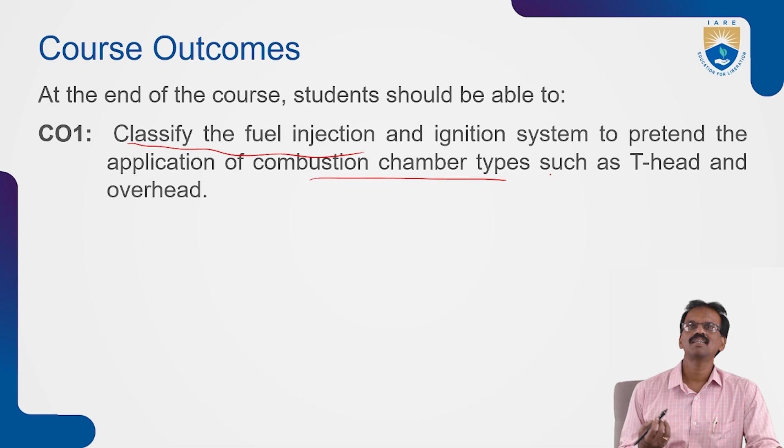Before going to our lecture, we'll see our course outcome for this topic, mainly unit one. At the end of the course, students should be able to classify the fuel injection and ignition systems, and to interpret the application of combustion chamber types such as T head and overhead based upon the different combustion processes.

We know that the IC engine is a heat engine because it converts the chemical energy of fuel into heat energy and mechanical energy. Based upon the combustion, if the combustion takes place outside the cylinder, we call them external combustion engines. If the combustion takes place inside the cylinder, we call those internal combustion engines, IC engines.

Internal combustion engines are mainly two types. One is the SI engine, another one is the CI engine. The SI engine is the spark ignition engine. It means ignition or combustion takes place by the effect of the spark plug, because the spark plug gives the ignition and combustion will start in the cylinder. We already discussed SI engines.

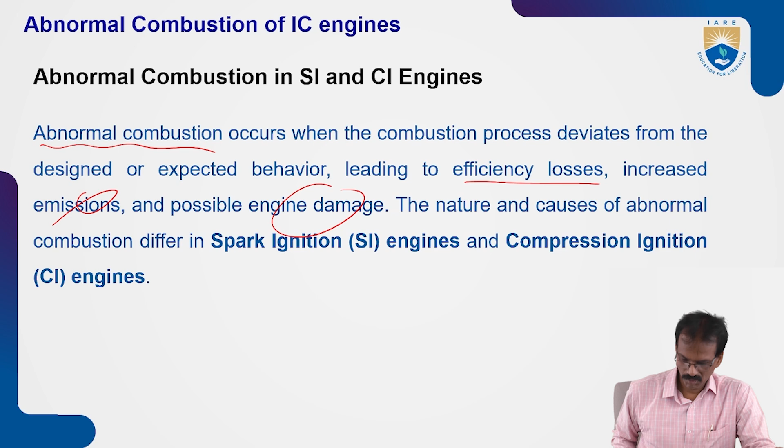Knocking. This is a very dangerous effect of the abnormal combustion process. Detonation is the main drawback of abnormal combustion in IC engines. We'll see what is the cause, what is the reason behind this. The end gas, otherwise unburned mixture, auto ignites due to high temperature and pressure before the flame front reaches it.

In normal combustion, the spark plug gives the spark. Due to this spark, ignition takes place, and due to the ignition, combustion will start and the flame will start. Due to this combustion, the flame will expand or propagate from this point throughout the unburned mixture. In this way, the systematic propagation of flame goes forward to burn the unburned air fuel mixture.

This gives the peak pressure. We get the peak pressure after TDC, very near to TDC. We already discussed this one. So this is the required combustion process, the normal combustion process.

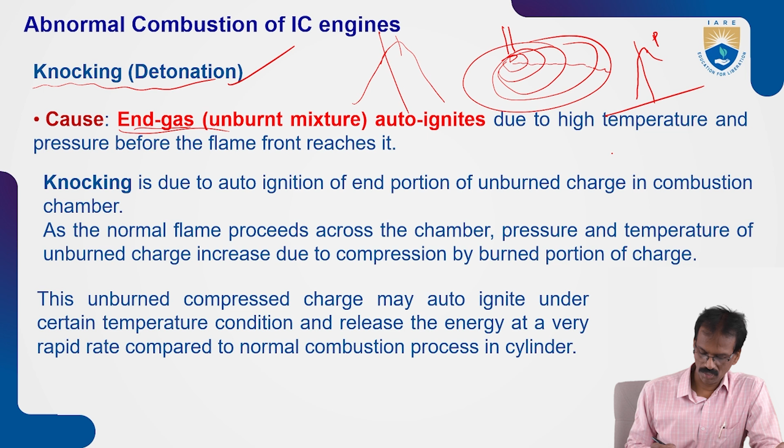But in abnormal combustion, what will happen? The end gases or end fuel auto ignites. Suppose this is the cylinder and this is the spark plug. Due to the effect of the spark plug, ignition takes place and combustion starts. The flame propagates like this.

Due to this combustion process, high pressure and temperature are released. This high pressure and temperature compresses the unburned air fuel mixture here. Due to this high pressure and high temperature, the unburned air fuel mixture burns automatically without any help of the flame propagation.

Without any help of this flame. Okay. So self ignition will occur here without any effect of spark ignition or flame propagation, which starts from the spark ignition. Okay. So due to this self ignition, here we will see high pressure and temperature release. So one is the gradual increasing pressure and temperature, and another, just in the opposite direction, another pressure wave will occur. Okay, so due to these two types of pressure waves, we can see here.

So due to this effect, automatically we can't get the highest peak pressure. So sometimes this peak pressure will occur before TDC and very near TDC also, like this one. Okay. So due to the effect of this one, in the expansion we can't get the good high pressure, high thrust force to move the piston from top dead center to bottom dead center. So efficiency of the engine will reduce due to the effect of auto ignition or knocking or detonation process.

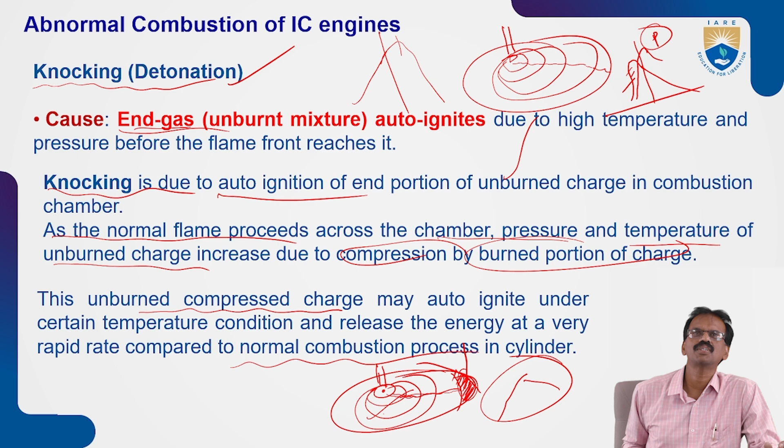So this is just like normal combustion. Due to the normal combustion, we will get the gradual increase of pressure and temperature. Okay, so there is some contradiction, because two types of pressure waves we will see here. Okay, so that is called knocking or detonation. This rapid release of energy during auto ignition causes the high pressure differential in the combustion chamber. Okay, a high pressure wave is released due to the effect of auto ignition. That pressure wave spoils the top surface of the piston, and the inner surface of the cylinder also.

Okay, so the motion of high pressure compression waves inside the cylinder causes the vibration of engine parts. Next, pinging noise, some type of noise is audible, so we can listen to that one. So this is known as knocking process. What is the knocking process? Due to abnormal combustion, due to auto ignition of the unburned fuel placed at the end of the cylinder, a high pressure wave will be released, and high pinging noise will occur. This high pressure wave causes the vibration of engine parts and pinging noise also.

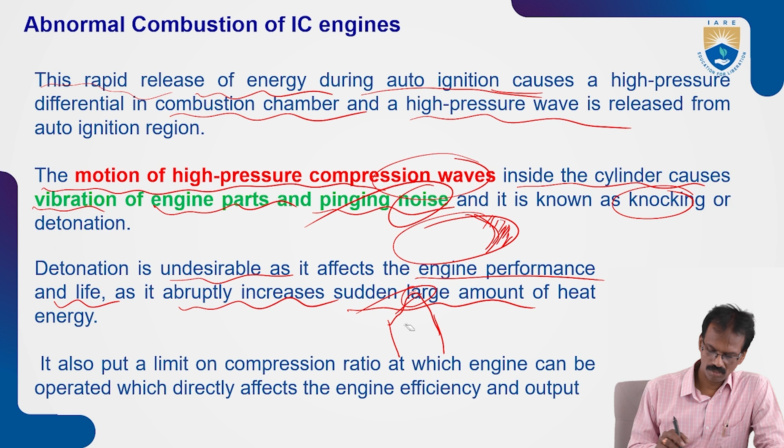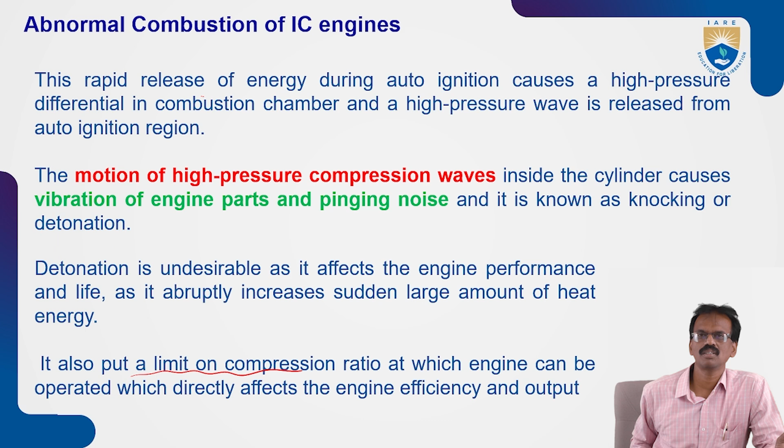Okay, so it abruptly releases a sudden large amount of heat energy. So high amount of heat energy and high pressure. So due to this, the parts of the engine will be spoiled. At the same time, the efficiency of the engine decreases. Okay, it also puts a limit on the compression ratio at which the engine can be operated, which directly affects the engine efficiency and the output, because it limits the compression ratio. So that leads to an effect on engine efficiency and output.

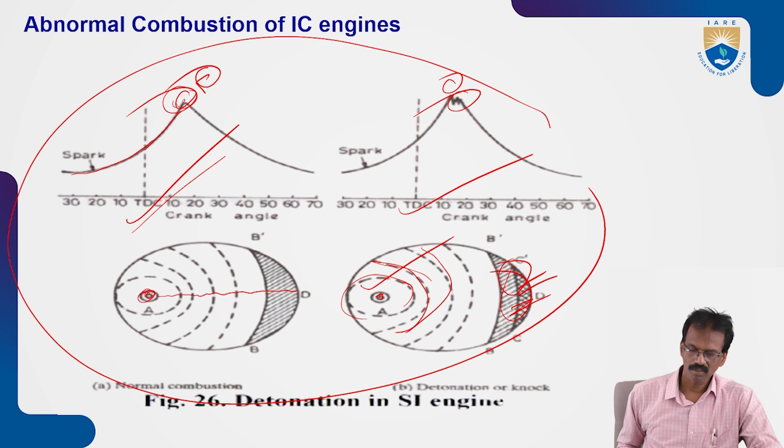Now we'll see auto ignition, already discussed. A mixture of fuel and air can react spontaneously and produce heat by chemical reaction in the absence of flame - meaning without any flame or ignition process. So the unburned fuel ignites selfly. That is called auto ignition. This type of self ignition in the absence of flame is known as auto ignition.

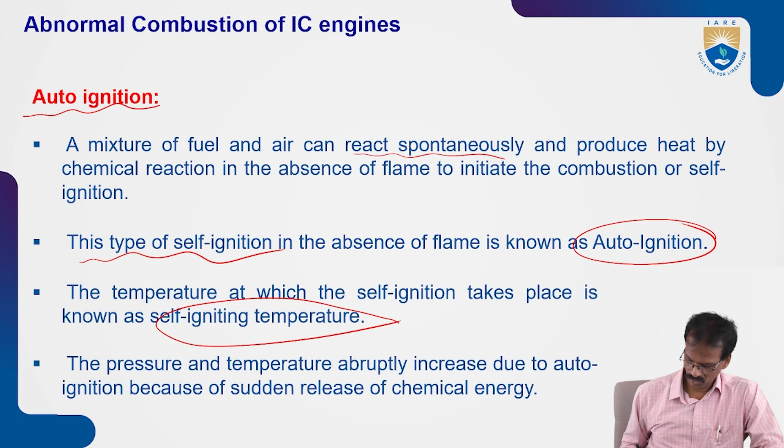Self ignition without any effect of flame or ignition systems like spark plug - so self ignition occurs, that is called auto ignition. The temperature at which self ignition takes place is known as self igniting temperature. The pressure and temperature rapidly increase due to auto ignition, because of the sudden release of chemical energy. This auto ignition leads to abnormal combustion, known as detonation.

Detonation is undesirable because it has a bad effect on engine performance and life. This detonation or knocking will spoil or reduce the performance of the engine, reduce the life of the engine, and spoil engine parts. It abruptly increases the sudden large amount of heat energy. In addition, knocking puts a limit on compression ratio, because this knocking influences the compression ratio. If the compression ratio is influenced, automatically the engine efficiency would decrease.

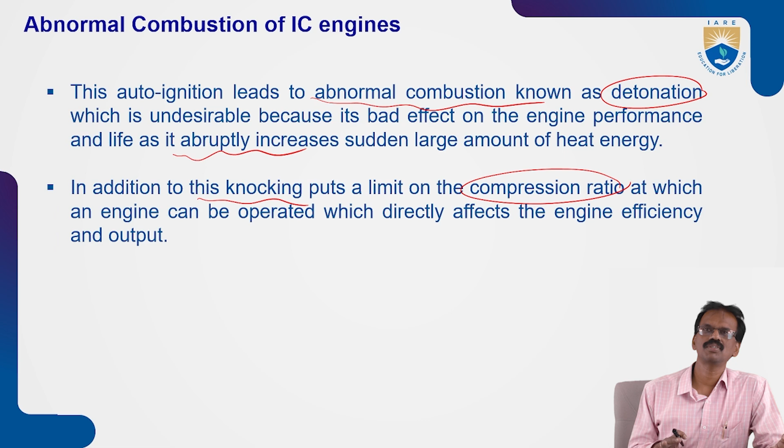So, pre-ignition - auto ignition and pre-ignition are very similar terms. Pre-ignition means: suppose this is the spark plug, this is the cylinder. Ignition starts by the effect of the spark released by the spark plug - that is the normal condition.

But sometimes, due to high temperature of the spark plug and some valves - due to high temperature of the valve surface and spark plug surface - the air fuel mixture will burn selfly without any ignition process. That is the pre-ignition process. Pre-ignition is the ignition of the homogeneous mixture of charge as it comes in contact with hot surfaces of the spark plug, hot surfaces of the walls, and hot surface of the cylinder.

So auto ignition may overheat the spark plug. Due to the effect of auto ignition, the temperature of the spark plug and exhaust valves will increase, and pre-ignition also occurs. It remains so hot that its temperature is sufficient to ignite the charge in the next cycle. So auto ignition leads to pre-ignition: due to the effect of auto ignition, the temperature of the spark plug surface and exhaust valve surfaces increases, which leads to the pre-ignition process.

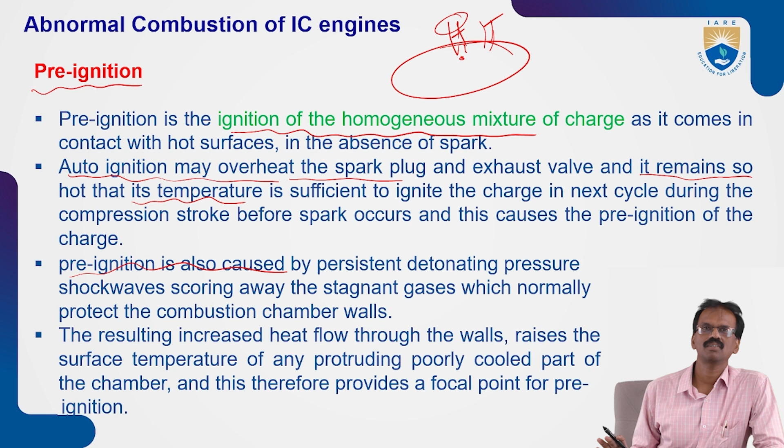Pre-ignition process means ignition occurs selfly without any effect of the spark plug, without any ignition process - ignition process meaning the spark given by the spark plug. Pre-ignition is also caused by persistent detonation pressure. Due to pre-ignition, sometimes the peak pressure will occur before TDC, which leads to a bad experience for the piston, because before TDC means the piston moves in the upward direction.

After TDC means the piston moves in the downward direction. So the pressure acting in the downward direction while the piston moves in the upward direction - that is not a helpful and useful thrust. Because of this pre-ignition, so many drawbacks, defects, or damages are there. We'll see.

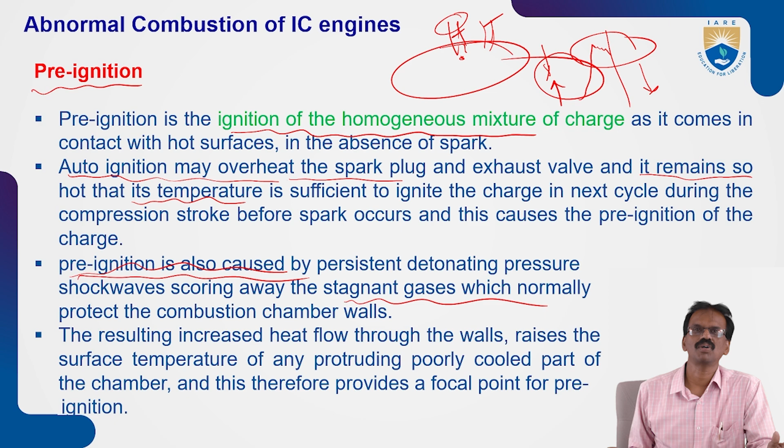Pre-ignition is also caused by persistent detonation pressure, shock waves scoring away the stagnant gases which normally protect the combustion chamber walls. So this is the process of pre-ignition. Next, we will see the effects of pre-ignition.

It increases the tendency of detonation in the engine. Pre-ignition leads to increased tendency of detonation. It increases the heat transfer to the cylinder walls due to pre-ignition. The heat released in the abnormal combustion process is absorbed by the cylinder walls. Heat transfer takes place from

combustion to the walls, combustion to the spark plug, and combustion to the exhaust valves. So due to this pre-ignition, the temperature of the surface of the spark plug, the exhaust valves, and the cylinder walls would increase. It increases heat transfer to the cylinder walls because high temperature gas remains in contact with the cylinder walls for a long time.

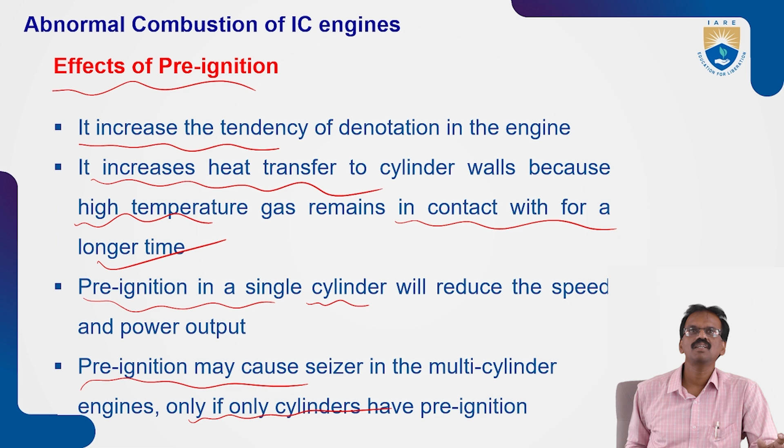Next, pre-ignition in a single cylinder will reduce the speed and power output also. This abnormal combustion leads to reduction in speed and power output. Pre-ignition may cause seizing of the piston in the cylinder due to the effect of detonation. Automatically the piston will seize in the cylinder. So these are the main effects of the pre-ignition process.

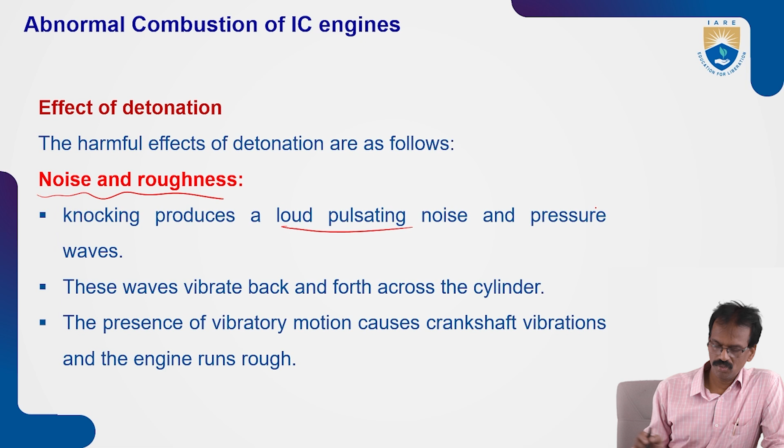Next, effects of detonation. The harmful effects of detonation are mainly noise and roughness. We hear some type of pinging noise and different types of noise. So roughness: knocking produces a loud pulsating noise and pressure waves, which vibrate the engine cylinder also.

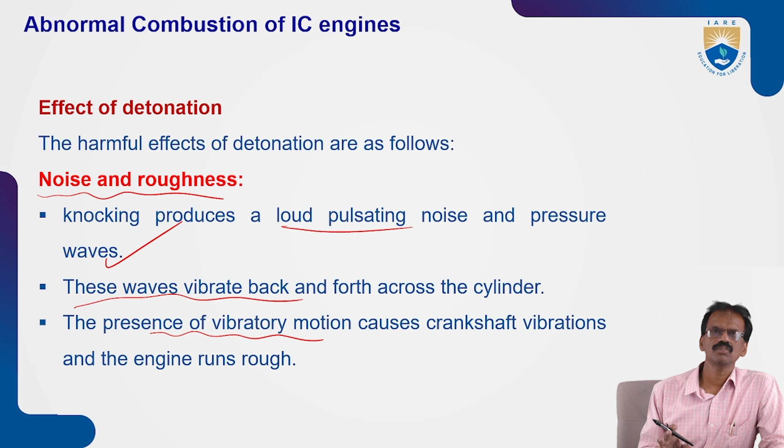Next, the presence of vibratory motion causes crankshaft vibrations, so the engine runs roughly. This is the effect of detonation.

Next, mechanical damage can also be seen due to the effect of detonation. High pressure waves are released due to detonation. These high pressure waves generated during knocking can increase the rate of wear of the parts of the combustion chamber, wear on the piston surface, and wear rate on inner surfaces also.

Severe erosion or damage of the piston crown or surface can occur due to the effect of detonation. Cylinder head damage also occurs, and damage on the inlet and outlet valves also.

So there are many problems and damages that occur due to the effect of detonation. In small engines, knocking noise is easily detected and corrective measures can be taken. But in aero engines, big engines, it is difficult to detect the knocking noise. Hence corrective measures cannot be taken, so that leads to big damage. Severe detonation may persist a long

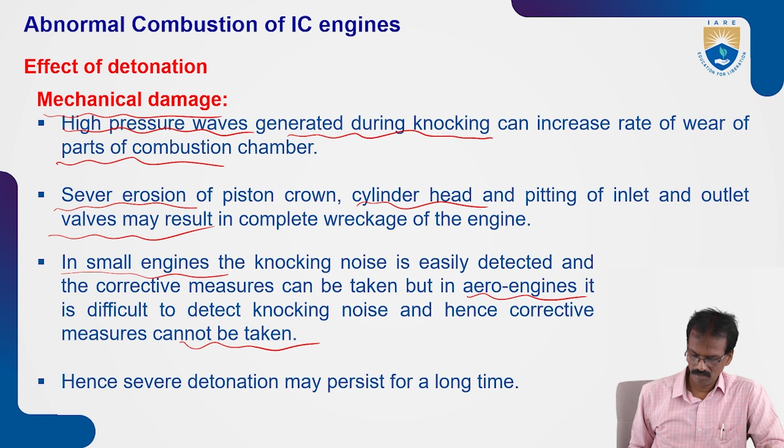time. Next, carbon deposits. Detonation results in increased carbon deposits. Due to this detonation, unburned fuel particles form on the inside cylinder surfaces.

Next, increase in heat transfer. Due to this knocking, high temperature and pressure are released. The temperature is absorbed by the surface of the cylinder, the spark plug, the inlet walls, and the exhaust walls. So knocking is accompanied by an increase in the rate of heat transfer to the combustion chamber walls.

The increase in heat transfer is due to two reasons. The maximum temperature in a detonating engine is about 150 C higher than in non-detonating engines. So automatically this high temperature leads to damage of the engine parts because of overheating, and the mechanical properties of that part will decrease.

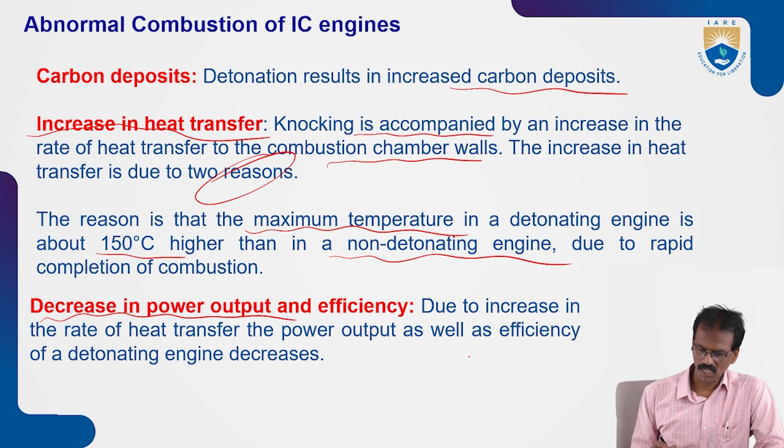Next, decrease in power output and efficiency. Due to the increase in the rate of heat transfer, the power output as well as the efficiency of the engine will decrease. Next, pre-ignition.

Pre-ignition causes an increase in the rate of heat transfer. Due to this heat transfer rate, pre-ignition occurs, which may cause local overheating, especially for the spark plug and the exhaust valves, which may reach a temperature high enough to ignite the charge before the passage of the spark, causing pre-ignition.

We'll see the various engine variables affecting knocking: temperature factors, density factors, time factors, and composition factors. Due to these factors, there are chances of getting knocking. We'll see what the different parameters are.

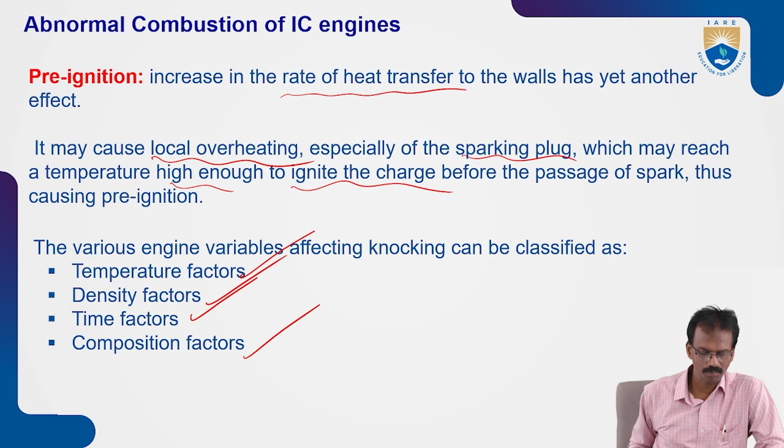The first one is temperature factors. Increasing the temperature of the unburned mixture increases the possibility of knocking. You have to maintain a certain temperature; more temperature leads to the detonation process.

Next, raising the compression ratio gives good output, but over-compression ratio leads to detonation or knocking problems. Supercharging is also very important, filling up the cylinder completely with the air-fuel mixture.

Okay, that gives good output, but over supercharging sometimes leads to detonation, the tendency of detonation. So you have to maintain the optimality.

Next, coolant temperatures. Coolant temperatures are very important. Delay period decreases with increase in coolant temperatures, which increases the tendency of knocking. So how to maintain all the parameters.

Next, density factors also. Density of the fuel - increasing the density of unburnt mixture will increase the possibility of knocking in the engine. So the engine parameters which affect the density are as follows.

Increased compression ratio increases density. If we increase the compression ratio, you know that's total volume by VC. Next, increasing the load opens the throttle valve more, and thus density of the charge will be increased.

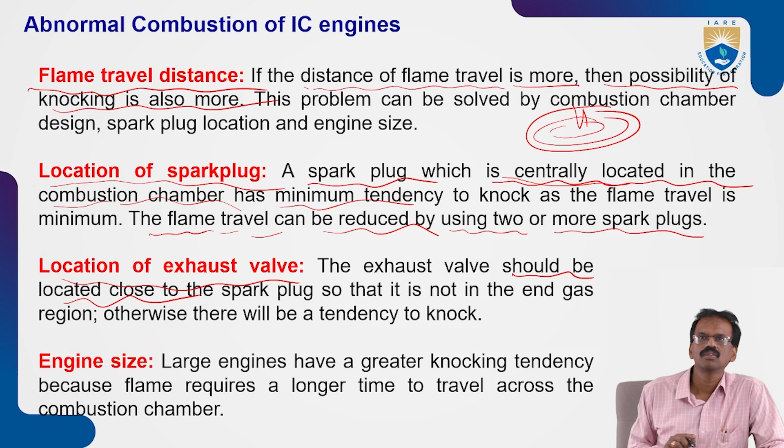Next, location of exhaust valves is also very important. The exhaust valve should be located very close to the spark plug, so that it is not in the end gas region. Otherwise, there will be a tendency.

Due to the effect of the exhaust valve, unburned fuel particles or exhaust gas will be exhausted to the outside. So automatically you know that 40 to 50% of heat will be exhausted by exhaust gases through exhaust valves. So positioning of exhaust valves is also very important.

Next, engine size is also a very important parameter. By controlling these sizes, we can reduce the tendency of knocking. Large engines have a greater knocking tendency because the flame requires a longer time.

Because large size means flame travel distance is very high. If the flame travel distance increases, automatically the tendency of knocking would increase. So these are very important parameters we have to consider when designing the engines, preparing the engine cylinders.

Due to abnormal combustion, which is the main problem, knocking or detonation occurs due to auto ignition or pre-ignition. We have to address that problem. To overcome it, we have to take care of influencing parameters like flame propagation distance, location of the spark plug, location of the exhaust valves, engine size, delay timing, time factors, and density factors - we have to consider these.

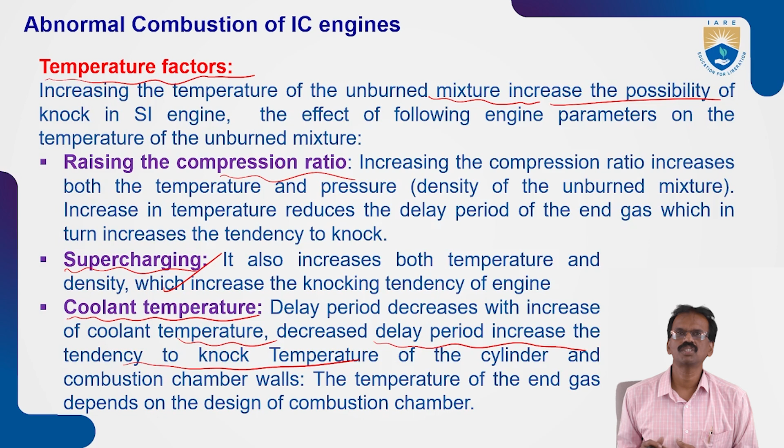Next, temperature factors also. So all these factors we have to consider. By controlling these factors and based upon the optimality of these factors, we have to design the engines. By considering all these factors, we can reduce the knocking or detonation problems, and then we'll get the normal combustion process in the IC engines.